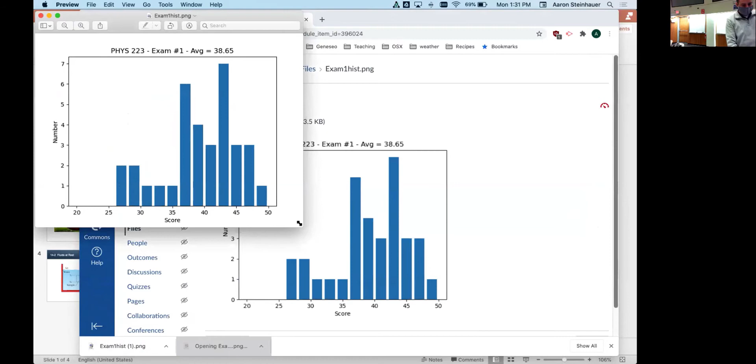Now, what were we looking at? This is what we're looking at: the histogram of scores for exam 1. There was out of 50 points altogether - there wasn't a 50, I think 48 was the highest score.

There's a pretty nice distribution of scores, a little more down here in this tail than I would like, but the overall average was a 38.65 out of 50, which gets us to about 77, which is pretty good for a physics exam. So I'm not at all displeased with that.

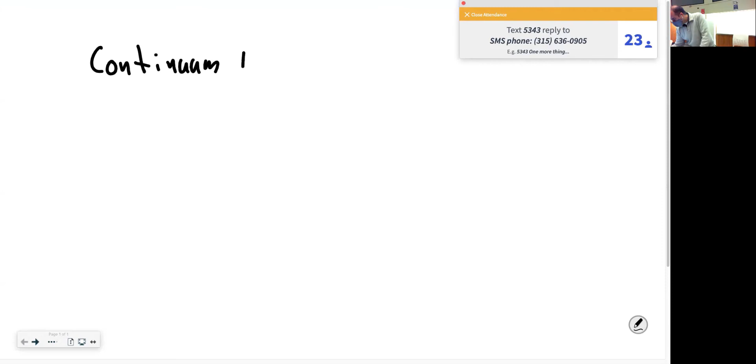So in Analyt 1, you are always thinking about point particles. Even if you talked about a ball being shot out of a cannon, you were really talking about a point mass at the center of that ball moving through some region of space and having forces acting upon it.

We have some nomenclature that you've built up over the past years on point particles. And we need to think about how we want to think about those same concepts in this new continuum mechanics.

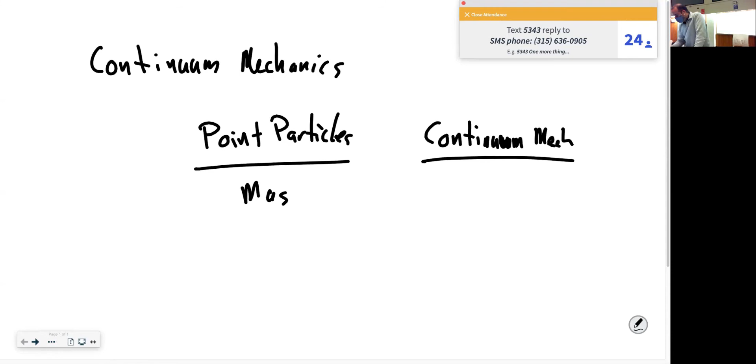So for instance, you can talk about the mass of a point particle, the force on a point particle. Those aren't as relevant specifically to a fluid, right? The total mass of the fluid inside this jar isn't all that useful unless I want to chuck this jar of water at the wall, unless I want to treat it like a point particle. I almost never will want to treat it like a point particle.

I'm much more interested in the behavior of the fluid itself, the behavior of the individual elements within the fluid itself. So what can we use instead of mass that would relate to the fluid as a whole instead of some element of the fluid? Density is exactly what I'm going for.

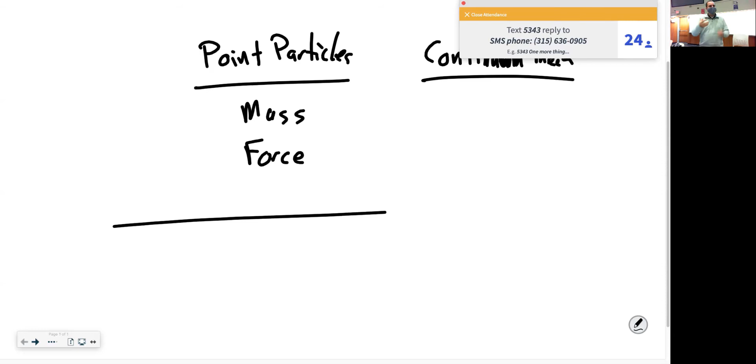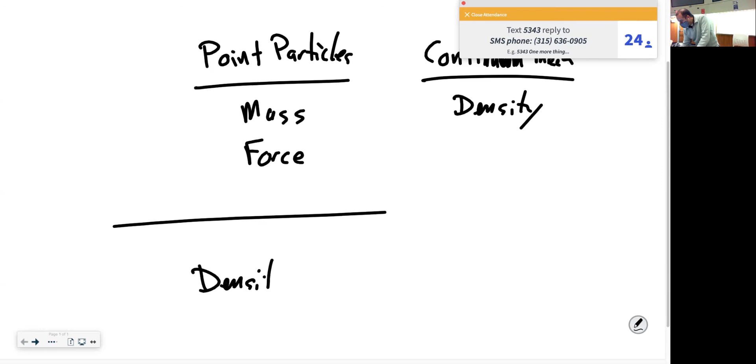So instead of mass, where we're thinking about the entire mass of something, we're thinking about density. This is again from high school physics or even high school chemistry. We usually use the Greek letter rho to signify density.

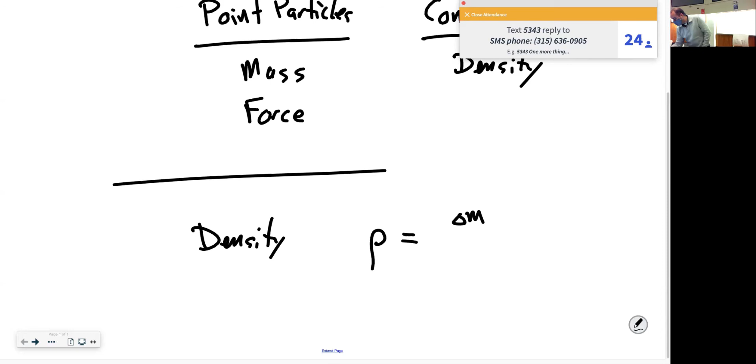You can think of this as delta M over delta V, where delta M is a change in mass, and delta V is a change in volume. Even this is an overcomplication of the thing.

If you're talking about an incompressible fluid, what does that imply about the density of the fluid? It's constant. And so this is a general definition — the deltas are only important if your density can change. If your density cannot change, you can do a total mass divided by a total volume, and you never have to worry about integrating over anything or doing any weird differentials. Really, it's just mass divided by volume for an incompressible fluid. But this is more general.

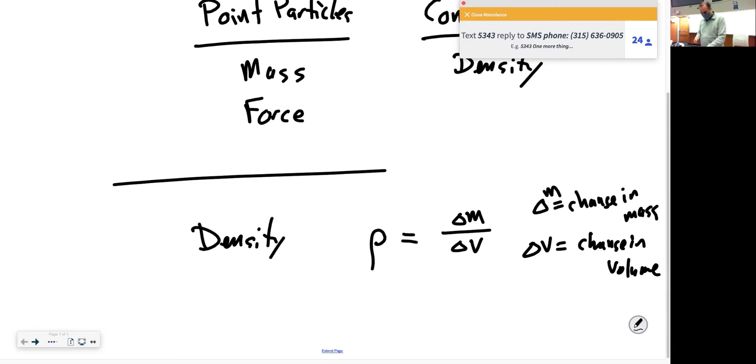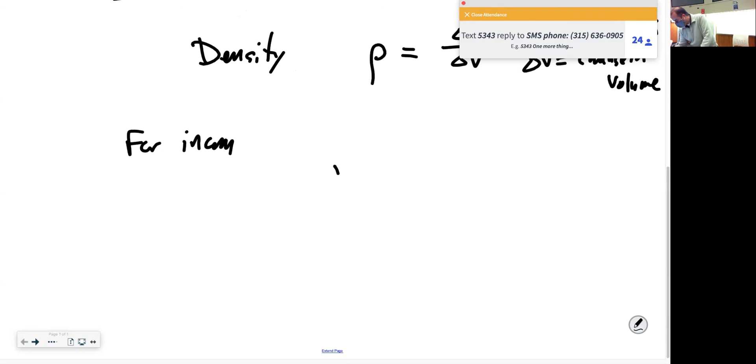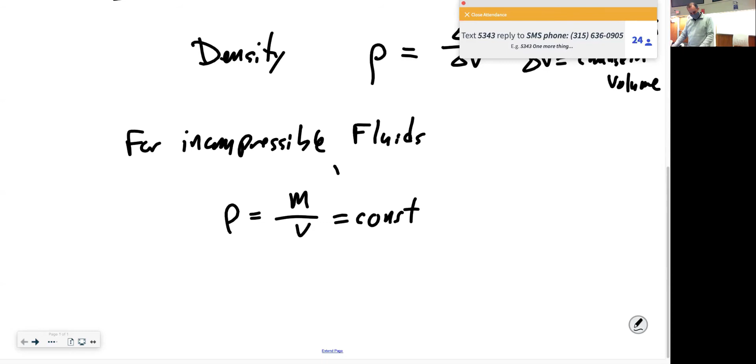So for incompressible fluids, this implies that density is just equal to mass divided by volume, and that this is constant within the fluid itself. We can take any chunk of this we choose, measure the total mass, measure the total volume, and that gives us the density of the entire fluid as a whole.

These may or may not be things that you're familiar with, but it's useful to build up a general idea of what these density numbers are.

How common is it for a fluid to be completely incompressible, like unable to be compressed at all? Right, never. There is no true ideal incompressible fluid that I know of.

Maybe like the centers of neutron stars or something like that, but I think even that is compressible. In practice, fluids that are under normal circumstances in which we would encounter them are basically incompressible. Within our ability to measure it, the density would not change. But that's, again, shoving some details under the rug.

Those details are pretty inconsequential though for water flowing through pipes, or anything you'd be dealing with at an atmospheric pressure level, or even in the ocean. The density even at the bottom of the ocean is not substantially different than the density at the top of the ocean. In fact, it depends more on what's in the water — salt water has a slightly different density than fresh water, and that's more important than the density as a function of height. Does that answer the question? Okay.

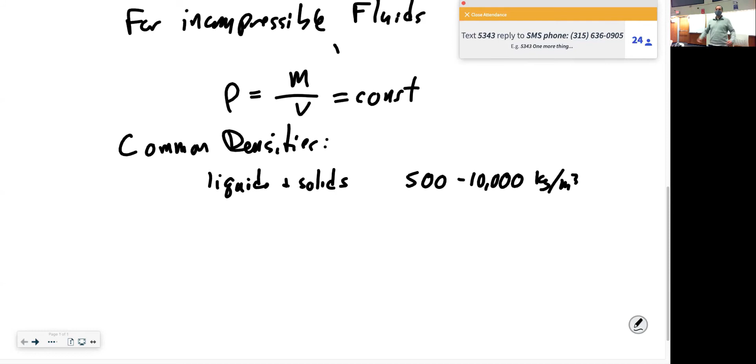Now, a cubic meter is a really large chunk of volume, right? You're talking about maybe half the size of this table underneath it. That's a pretty big chunk. You wouldn't be able to pick this up if it were filled with water. In fact, water — anybody know what the density of water is? Fresh water?

It is 1,000 kilograms per cubic meter. In fact, if you do unit conversions, this is equal to 1 gram per cubic centimeter. And this is the original 1795 definition of what a gram was: the mass of 1 cubic centimeter of water.

That's not a bad rule of thumb to have in the back of your head about densities of things. So this is no longer the way the gram is defined, or the kilogram is defined. In fact, the way the kilogram was defined was just changed in the past couple of years to finally be based on actual physical principles, not some standard in a vault in France. But that's neither here nor there. This still is roughly true: the gram is still roughly defined such that 1 cubic centimeter of water has the mass of a gram.

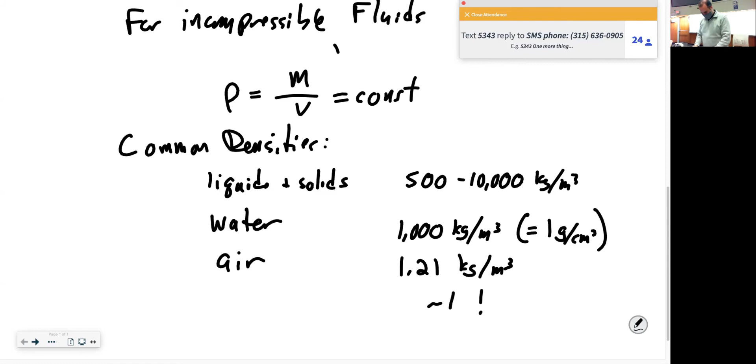Okay, there's one more thing in our table that we needed to talk about, and that was force. Again, we're going to think about forces differently than we did when talking about point masses. We're no longer interested in the force exerted on the fluid. If I was interested in the force on the fluid, say chucking it against this wall, I could revert back to my formulas from Physics 1. I'm more interested in the forces exerted by the fluid, by elements within the fluid, on other elements within the fluid and on its containers and things it presses up against.

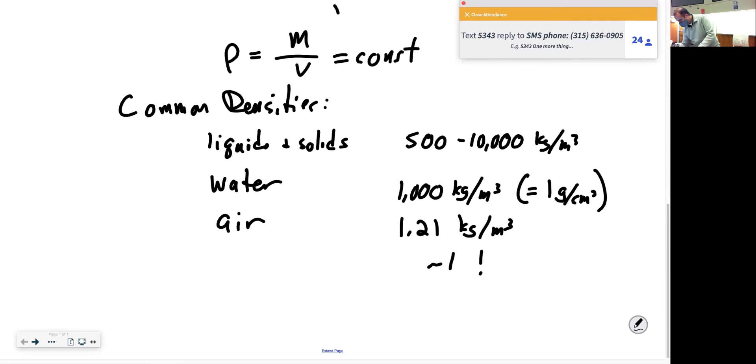That's really what I'm thinking about. We want force exerted by fluid elements, not on fluid elements. Does it exert a force? I can stick my finger in this glass of water and I'm not feeling great forces, but maybe that's just because the forces are really small, or maybe because something else is going on. But what kind of forces are we talking about? The force exerted by the fluid elements on other fluid elements and on the container itself.

What do we call the forces being exerted by fluid elements on other fluid elements? We refer to such a thing as pressure. So when we're talking about force for continuum mechanics, we're almost always talking about pressure. Let me go back up and write pressure here, and then we'll talk about what we mean by pressure down here.

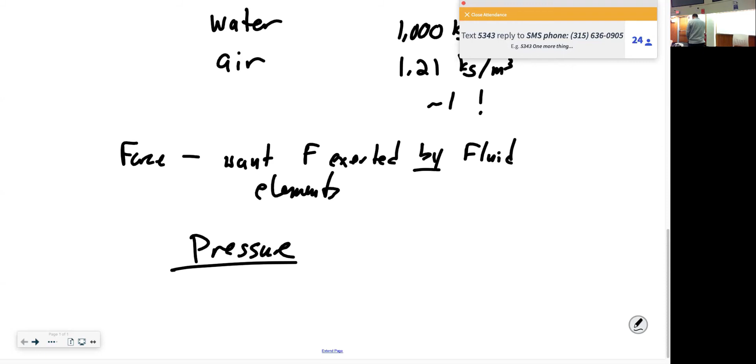Okay, how do we know it's there? How do we know that individual fluid elements are exerting forces on other individual fluid elements within this container? How do we know that individual fluid elements in this room are exerting forces and pressure on other fluid elements, on the air in this room? Right, you're definitely on the right track.

Your point was that each of these elements is sort of stacked on top of one another and must be holding up the one above it. What would happen if there were no forces being exerted by fluid elements on other fluid elements within this bottle? There's a lot of water molecules in here — they would all fall to the bottom. Gravity wants to push them all to the bottom of this cup.

We know there's pressure here because there's some fluid near the top of this cup. If there were no pressure, all of those atoms would be at the bottom. Similarly with the air in this room — if there were no pressure, if there were no forces being exerted by this fluid element on this fluid element, then all of those fluid elements would want to go down. Gravity is pulling them towards the floor, and all of the air would end up on the floor.

So it must be that there's some forces being exerted because we are overcoming gravity to have water elements that are above the floor and air elements that are above the floor.

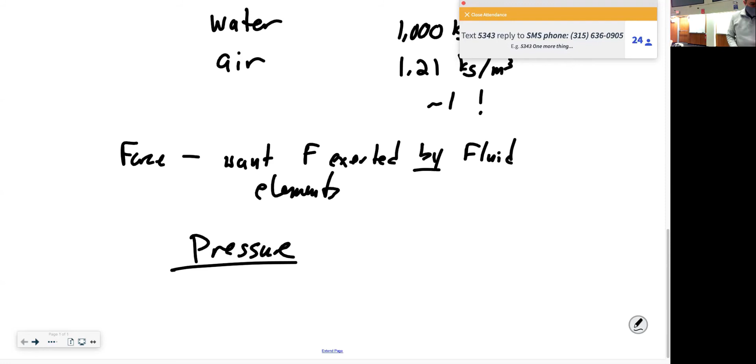Okay, how would we measure it? How do we go about measuring the pressure in a fluid? This is actually trickier than you might think. Here's the actual way that you might want to do it.

If you have a device that has a perfect vacuum inside of it, and let's say a spring attached to it, and you put that device in your fluid, you can measure the force on the plate that is being exerted on that spring, right?

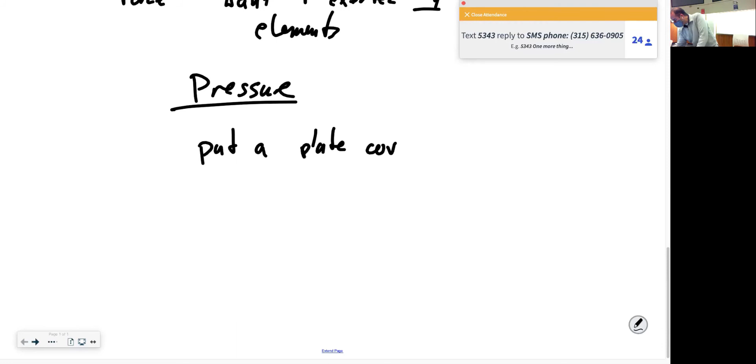So, pressure: put a plate covering a vacuum in fluid, measure force on plate.

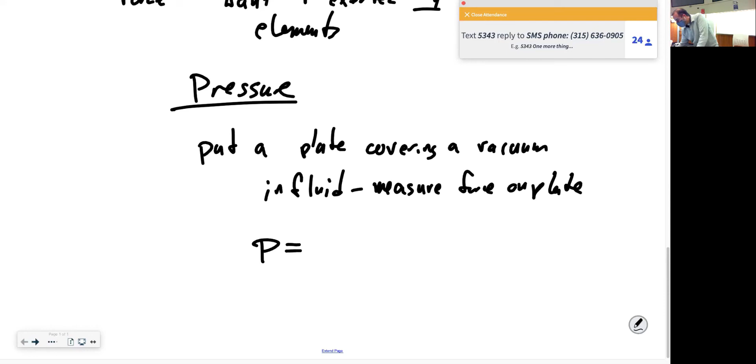When you do that, the pressure will cause a force on the plate, and you can measure that pressure by the force that's exerted on that plate divided by the surface area of the plate, if P is uniform across the plate.

As you can imagine, if you want to get complicated about this, you can break this down into some dot product integral thing, but we're almost never going to have to worry about that in this class. Pressure equals force divided by area is pretty much as complicated as we're going to make it.

Okay, now, however, force is a vector. Question?

Yes, the question is, for the Zoomers who couldn't hear it, couldn't we think of this pressure also as the force exerted by all of the individual tiny molecules and atoms within the fluid banging up against other fluid molecules and walls and things like that, and just add them all up and get a force and a pressure? The answer is yes, and we are actually going to do that when we talk about thermodynamics in 3 or 4 weeks.

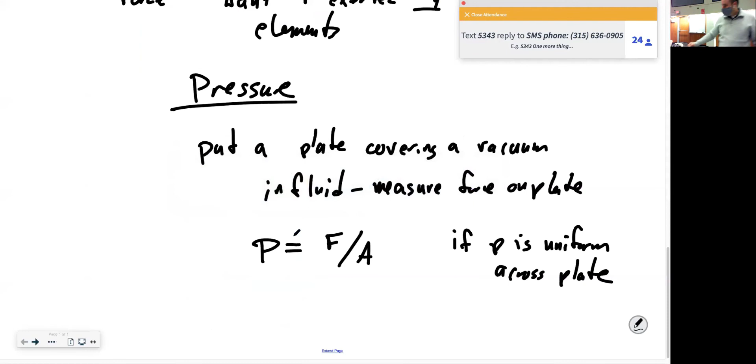If we were to make these actual vectors, F is a vector and A is a vector, right? So we would really say F equals P times A, and then P must be a scalar. That's the only way that works. If you change the orientation of that sensor, you're changing both the direction of force and A, but P doesn't change, and the value of P doesn't change. So P, bless its heart, is a scalar.

It doesn't need to worry about what direction it points in. It points in all directions. This pressure is a force that is exerted by every fluid element on every other fluid element, regardless of the direction that it's in.

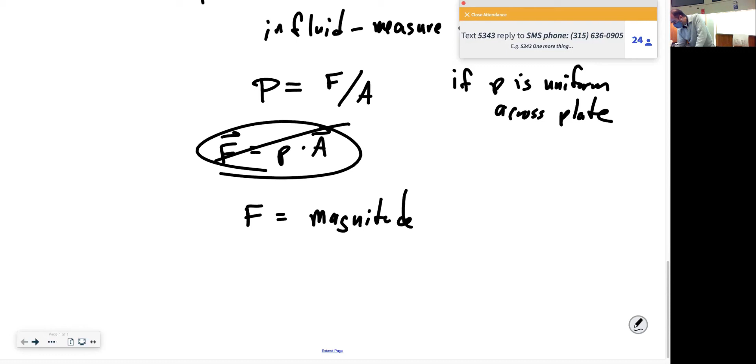So I really don't, I mean, this is right, but I'm never going to think about this again. I'm going to think about F as the magnitude of the normal force, and A as the area of the surface of contact.

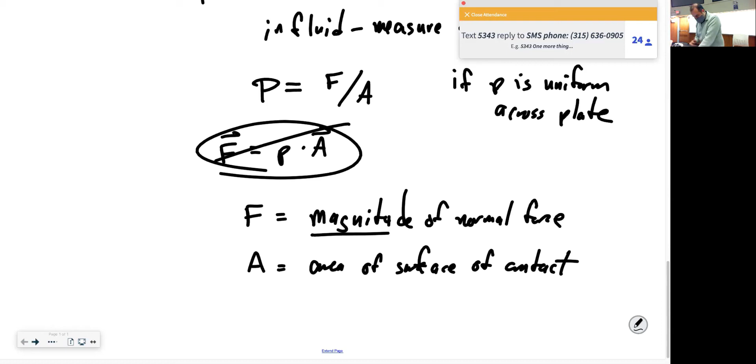Okay, what are the units on P? This is my sort of triangular bracket notation to mean units of. I think I may be the only one who does this, but it's useful for me. So the units on P are the units on force divided by the units on area. This is newtons per square meter.

Obviously, this has to be named for some famous physicist of yore. Does anybody know which physicist gets the distinction of having the newton per square meter named after him? It is Pascal. So 1 newton per square meter is equal to 1 pascal, or if you like your two-letter or one-letter abbreviations, capital P lowercase a. This is named after Blaise Pascal, who in the 1600s did pioneering work on hydrodynamics.

Okay, so anybody know what the air pressure is in this room in pascals? Go ahead. It's about 10 to the 5. It's about 100,000 pascals, the air pressure in this room. Every fluid element in this room is exerting 10 to the 5 pascals of pressure, newtons per square meter, on every other fluid element in this room, and on this table, and on this whiteboard, and on that screen, and on our skins, and on our eyes, and everything else in this room. That's a pretty big number.

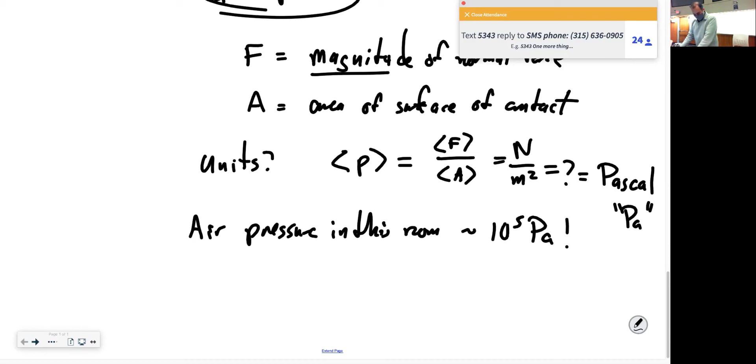About 10 to the 5 pascals. So if we were to build ourselves a vacuum chamber and cover that with a 1 square meter plate, the air in this room would be exerting 100,000 newtons of force on that plate. That's not a small amount. This is a rather large amount of pressure.

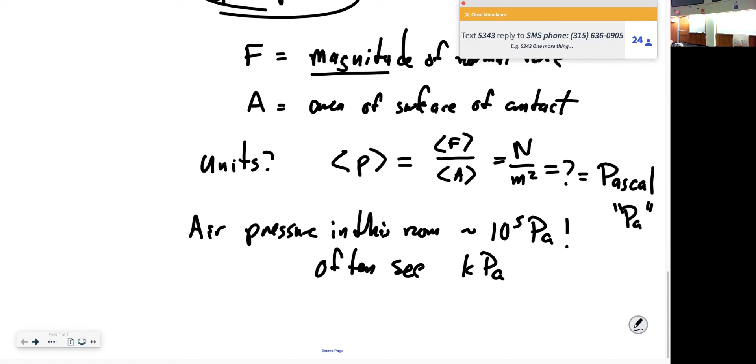In fact, you often will see kilopascals as a unit, as the standard unit instead of regular pascals. And in that case, room pressure is about 100, a little more than 100 kilopascals. This is one of those things where there is no industry standard on what unit should be used, though. You will see a lot of different units used for pressure. So let's just list some of them so that when you run across them, you'll know what they are. They're just different measures of ways of measuring pressure. So lots of other units.

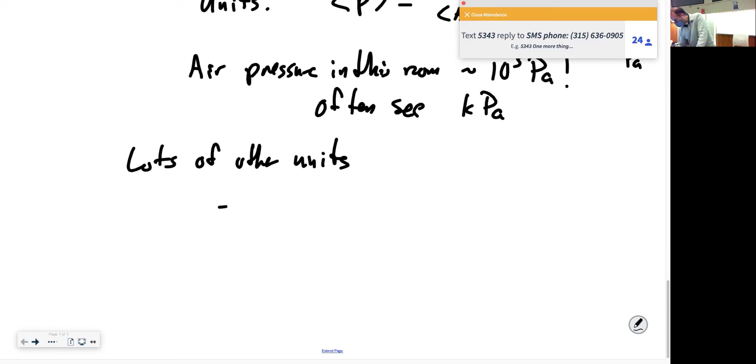Let's go through some of them. One atmosphere. That's actually a really useful unit of pressure. Obviously, it wouldn't be a very good definition if it were just defined to be whatever the pressure is in the room that you're in right now, because that changes from room to room and even from day to day and hour to hour within the room you happen to be in. So there is a true definition for this, which is 101.325 kilopascals.

Is this always the pressure in the air on the ground? I just gave you the answer to this. The answer is no. This is a definition of 1 atmosphere, but this is roughly an average across the Earth, across time. It can change if you change in elevation. It can change from day to day as the weather changes. High pressure system moves in, it'll be higher. Low pressure system moves in, it'll be lower. But this is the definition of 1 atmosphere.

It is at sea level, that's right. The average at sea level, that's right, ish. But again, we define it to be that. Even if the average at sea level weren't exactly that, that is the definition of 1 atmosphere now. So we're stuck with it. There is the torr. Another name for torr is millimeters of mercury, mmHg.

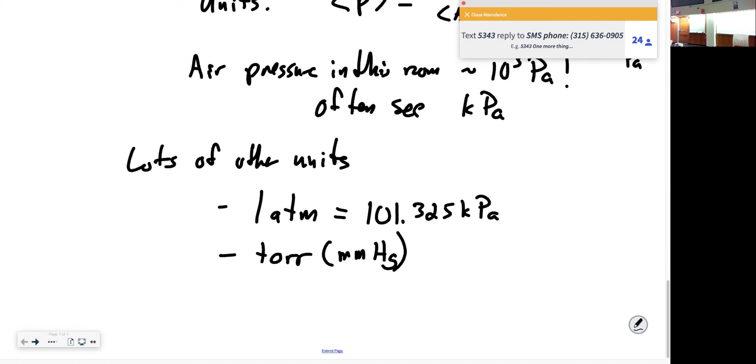Again, if you build a mercury barometer, a barometer is a tool used to measure atmospheric pressure. They used to use mercury in these barometers, and the way they worked was the air pressure would push on the bottom and push mercury up into some tube, and the height of that mercury would tell you the pressure of the air that was bearing down on it. And so how high that went in millimeters was actually a scalable result. And so a torr is 1 millimeter of mercury in an old-fashioned mercury barometer. So 1 atmosphere is equal to 760 torr. Oops, I forgot the 0.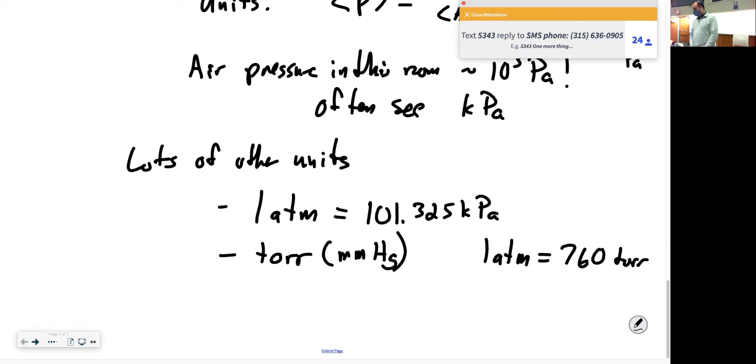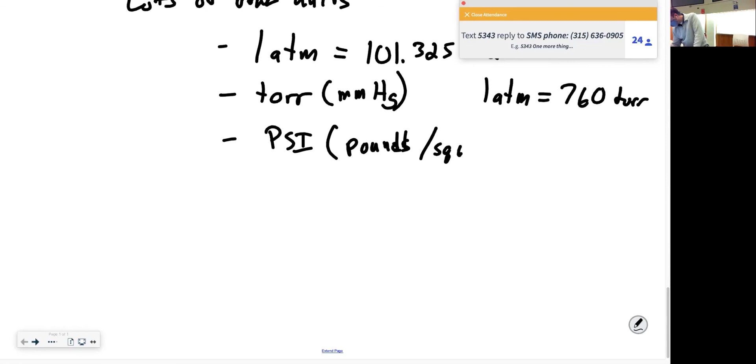So another one you'll come across a lot is PSI. If you're filling up your bicycle tire or your car with air, PSI is the standard unit to use. PSI, of course, stands for pounds per square inch. Obviously, not a unit that any physicist would be eager to use, because who wants to use pounds and inches for their measurements? But you should know about it because you'll run across it in your day-to-day life, and it is a valid unit of pressure. Why? Because you need force divided by area. Well, square inches is certainly going to be an area.

Is pounds a force? It's a weight. Yeah. Is a weight a force? It is. Actually, pound is the English unit of force. It is not a mass. Kilograms are masses, pounds are forces. Pounds are the force that you're exerting on your scale. Kilogram is inferred by what the scale thinks the force of gravity is where you're standing on that scale, and it does a little conversion for you to convert that force into a mass. But it has to be measuring a force, and it is a force.

Does anybody know what the English unit of mass is, equivalent to kilograms? It is the slug. The English unit of mass is the slug. So just be glad we're using metric units now. That's all I got to say. In any event, pound is a perfectly legitimate unit of force. Square inch is a perfectly legitimate, if crazy, unit of area. So this is a unit of pressure. PSI works just fine. So 1 atmosphere is equal to 14.7 PSI. You'll also see it written lb per in squared, pounds per square inch, PSI.

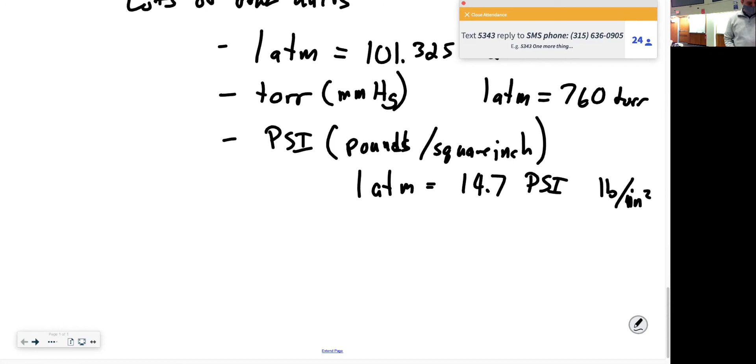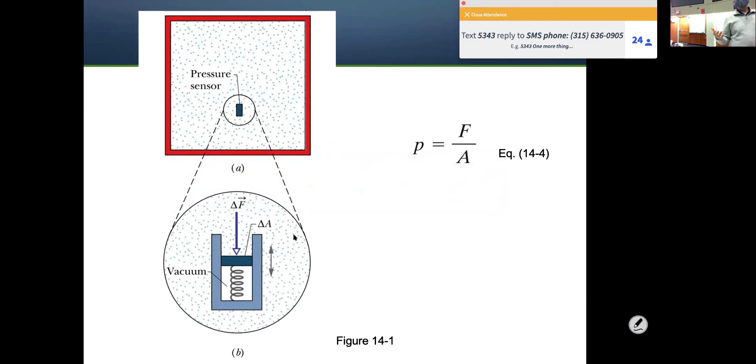Okay, so I've got 10 minutes left. Excellent. So this is now getting to be somewhat old news, but does anybody know the regulation pressure inside an NFL football? Probably not. That's okay. This actually became an issue, probably 5 years ago now, in the famous Deflategate case. For those of you who don't know, this was 2015 in a playoff game between the New England Patriots and, I don't even remember who the other team was now. The Colts, maybe? I can't remember.

In any event, I'm gonna write it down. What is the regulation PSI? Again, you don't need to know this. It's just an interesting story, and it will lead us to another important question, which I need you to understand. So just bear with me as we tell the story. We're getting somewhere interesting. NFL regulation football.

According to the rules, it has to be between 12.5 to 13.5 PSI, 86 to 93 kilopascals. So each team provides their own footballs to the game, and there's an official who goes before the game and checks them all to make sure they've been properly inflated.

And at halftime, I guess Tom Brady threw an interception in the first half of this game, and the defending player took it back to their sideline, happy to have intercepted the ball, and noticed that it felt like it was underinflated. The other team's coaches notified the officials, who went in and measured all the other balls at halftime and noticed that almost all of them were underinflated by about 2 PSI. They were all at about 10 instead of 12 to 13.

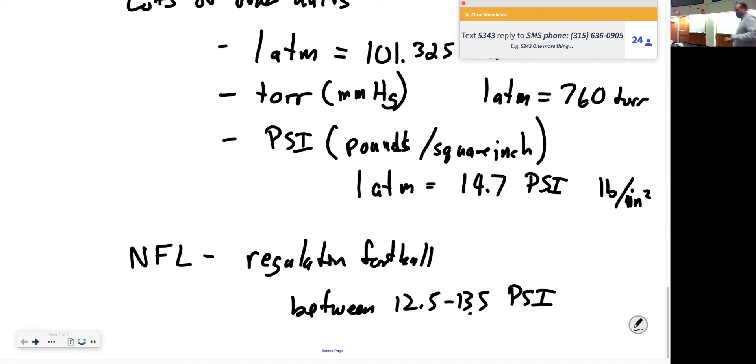Okay, so what's going on? We have been talking about absolute pressures, the absolute forces that a fluid would exert on a plate that's covering a vacuum. When we're inflating a football, a car tire, a bike tire, a basketball, or anything else, we are not measuring it against the vacuum. We're measuring it against the outside pressure. So what we're measuring when we're inflating something like that is called the gauge pressure.

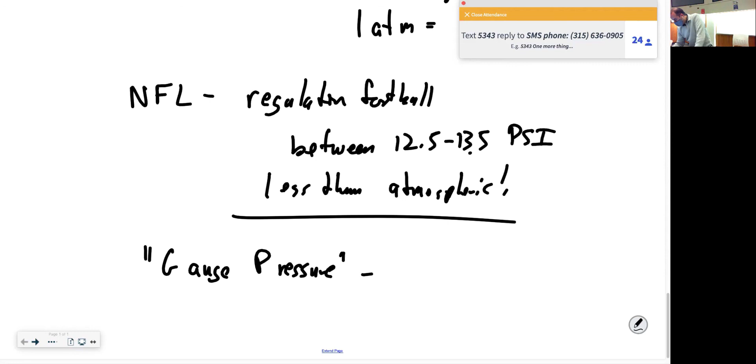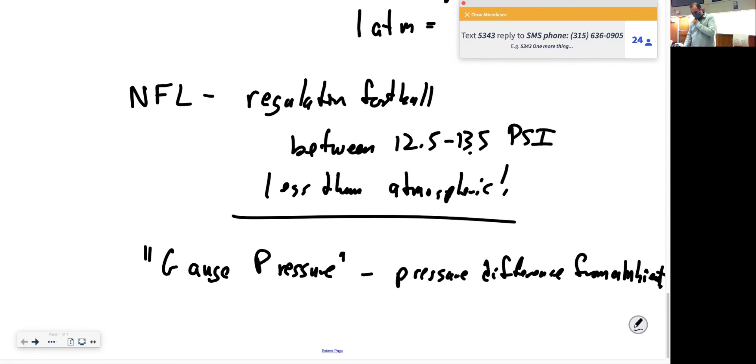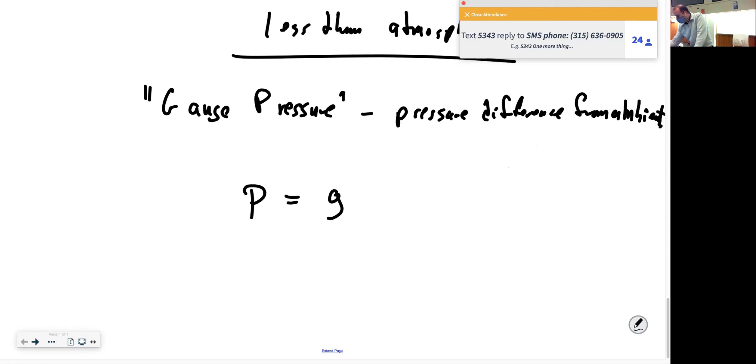Gauge pressure is the pressure difference from ambient, ambient meaning the atmospheric. So absolute pressure equals the gauge pressure plus the atmospheric pressure. So that pressure gauge that you're using is only measuring the difference in pressure between the inside of that football and the outside of that football. That is the gauge pressure.

That's really all it can measure. It doesn't have any vacuums in it. It can't measure the absolute pressure. All it can tell you is how much higher the pressure is inside than it is outside. And that is not an absolute pressure. So you have to be careful about this.

In fact, Neil deGrasse Tyson gave some explanations about the temperatures and pressures and thermodynamics involved, and he totally forgot about this, and he had to make a correction like 2 hours later, because he was thinking that these were absolute pressures and they're actually gauge pressures. So in all other ways you can be like Neil deGrasse Tyson, but don't be like that. Know the difference between gauge pressure and absolute pressure.

So unless I specifically mention otherwise in this class, when I say pressure, I will mean absolute pressure. But just know that there will be specific times, even in this class, where the right thing to think about is the gauge pressure. And you just need to think about, am I thinking about a pressure difference between these two places, or am I thinking about an absolute pressure of forces being exerted by this fluid on something else?